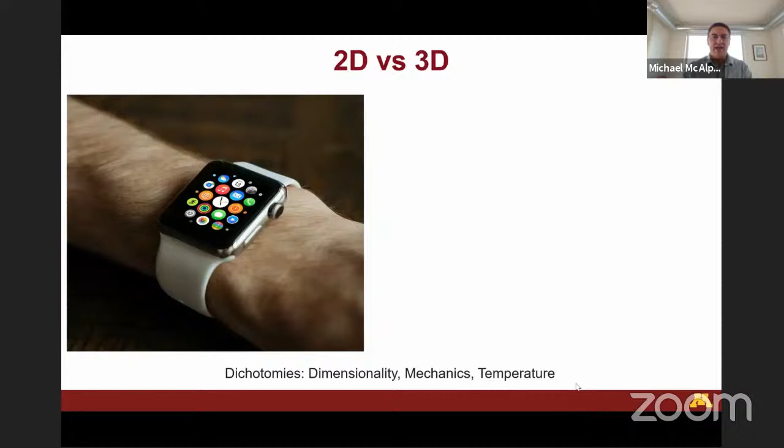But the question, and this is the question that Zhigang and Sigurd have been asking for 20 years now, and John Rogers as well, is: if one wants to integrate silicon or electronics with the body, what are some of the issues with doing that? And of course, one of them is the mechanical mismatch. Silicon is a single crystal, 100 gigapascal Young's modulus, brittle material, whereas skin is soft, flexible, and stretchable.

But there's also the fact that the silicon needs to be crystallized to be a single crystal. So that's a temperature requirement of over 1,000 degrees C, which is completely incompatible with biology. DNA can go up to maybe like 40 or 50 C before it denatures.

But then there's also the dimensionality mismatch. All of photolithography and semiconductor processing is planar, right? And biology, from the scale of DNA and proteins all the way up to organisms, is all three-dimensional. So there's that dimensionality mismatch. It's okay for a smartwatch when you have this sort of two-dimensional interface, but if you could take it to the third dimension, you might be able to grow electronics and biology together on the same common platform.

And actually, a lot of people don't know this because a lot of people haven't even heard of Minnesota, the state. Although this election cycle, we've been getting a little bit of attention.

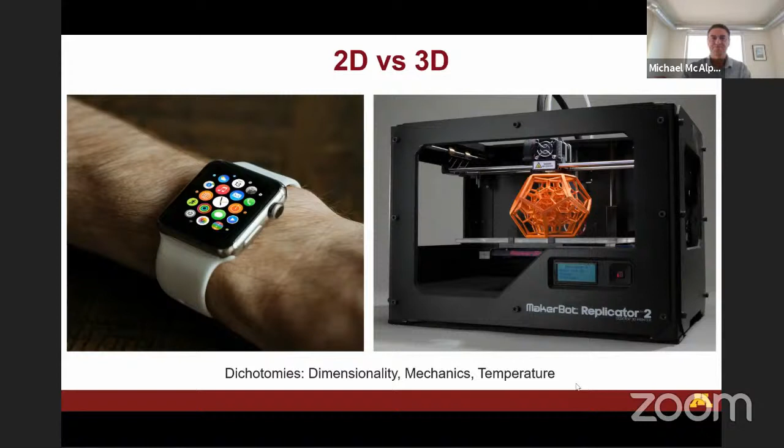And our printer setup is one that we custom built. We set it up back in 2015. It's basically an Aerotech motion control stage, and then we mount these syringes on it where instead of heating a thermoplastic and extruding, we just use pneumatic extrusion. And then sometimes we do UV curing, like if we're printing silicones or ionic hydrogels.

On the same comment, the thermoplastics are replaced with inks, right? So we basically can have multiple nozzles printing multiple types of inks on the same common platform, all pneumatically dispensed. And you can image the entire process. And to be honest, I used to think that this is the most important part of the 3D printing technology. And as I'll show later, I've realized that the most important part of the printing technology is the one that you don't see, which is the computer, which controls everything.

So I see printers now less as manufacturing tools and more as robots, part of a larger robotic system where the robot may be involved in subtractive processes and additive processes and artificial intelligence, and tracking and whatnot, all on the same common platform.

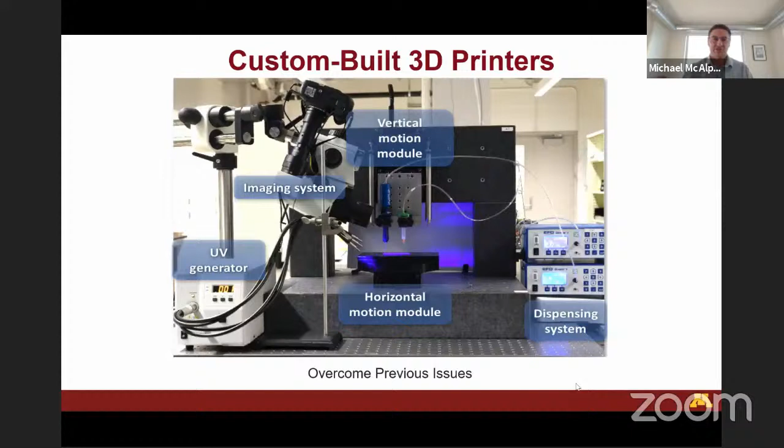And the nice thing about this platform is, from a scientific standpoint and engineering standpoint, you can merge many disciplines on a single platform. I mean, you have biological, biomedical, electrical engineering, mechanical engineering, manufacturing, computer science, chemistry, and the formulation of the inks, all on the same common platform. And it's amazing because we have students who are brave and they want to work at this interface, at this interdisciplinary type of field, and lots of exciting things in principle can be done here.

And another concept here that we've introduced is this idea that in addition to multifunctionality, in principle, it's also multi-scale. Now, we can't print at the nanoscale because in order to really print something, you have to be able to extrude through a nozzle. And so there's only so much shear you can apply before you damage the material or damage the nozzle.

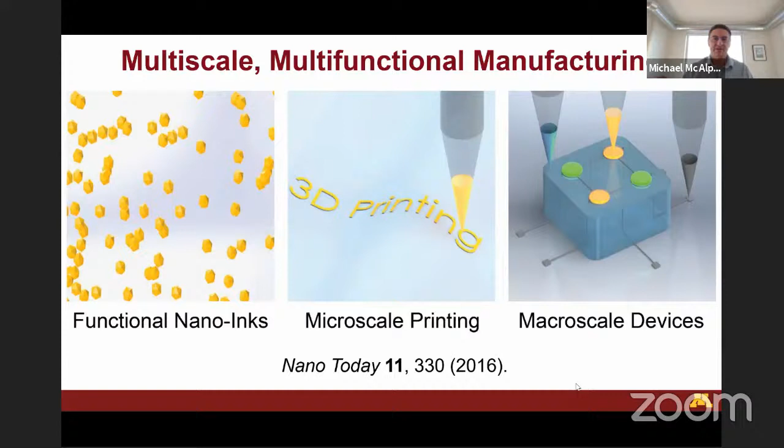But we do use nanoscale inks. So the ink can be at the nanometer scale, especially for incorporating functionality. And then we print at the micron scale, typically 10 to 100 microns or higher. And then we build devices which can be as large as a foot by foot by foot, right? Cubic foot. And so we start with our functional nano inks, we print at the micro scale, and then we can develop macro scale devices. So in that sense, it's a multi-scale and multifunctional platform. Okay.

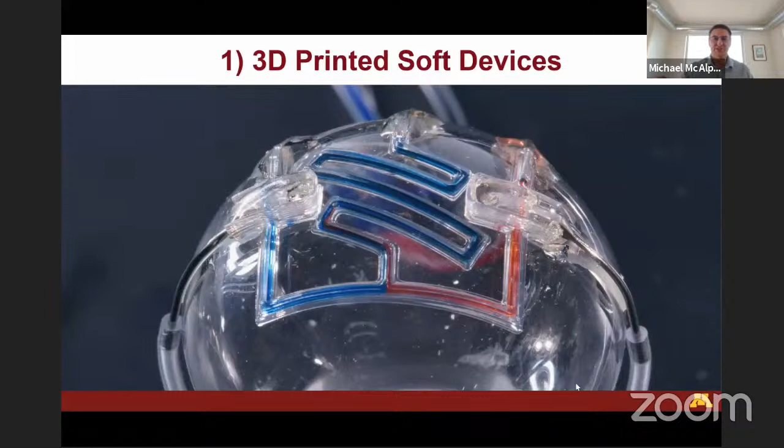So for the remainder of my time here, I'm going to focus on some specific things we've done, and these are just some highlights, really. And it's not just us, of course. Now many people are printing lots of different types of things, but these are some of the things we've done recently that I'm excited about. I'll start simple and then build complexity.

And so one of the early things we did, this low-hanging fruit, is organ models, right? Because we're in this biomedical arena here in the Twin Cities, and we were inspired by some of these papers, which say that surgeries, of course, come with risk, right? And this British Medical Journal has this infamous statistic that medical errors are the third leading cause of death. Whether that's true or not, I'm not sure. Especially now, probably coronavirus is the third leading cause of death. But

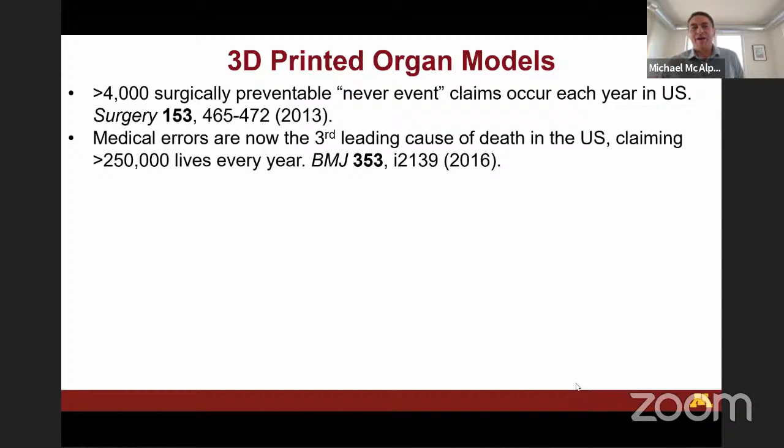there are risks associated with surgery, and there are many reasons for that, of course. But one of the reasons is that the doctors rely on two-dimensional images. I mean, they rely on CAT scans and MRI scans, which is 3D data. At the end of the day, it's 3D data, but it's represented in two-dimensional format for visualization.

And then they go to the surgery and they sort of had to improvise or piece together in their mind what the three-dimensional organ might look like. And this is an arena where 3D printing can play a role, because you can basically take that 3D data directly from the patient and print organ models that replicate the anatomical structure of the actual organ that's going to be operated on, right? So the doctor can analyze it in advance, plan the surgery. Residents can use it for practice.

And in fact, there are some papers which show that there are some statistical improvements in accuracy in patient selection, helping the patients themselves understand the surgical procedure, reducing the operation time, and reducing blood loss. All, of course, together in principle should help reduce surgical complications.

But the only problem with this is that these organ models are built around hard plastics. So you can't cut into them, you can't suture them. They don't feel like the organ. They replicate the anatomical geometry, but they don't feel like the organ. They don't have any functionality built into them.

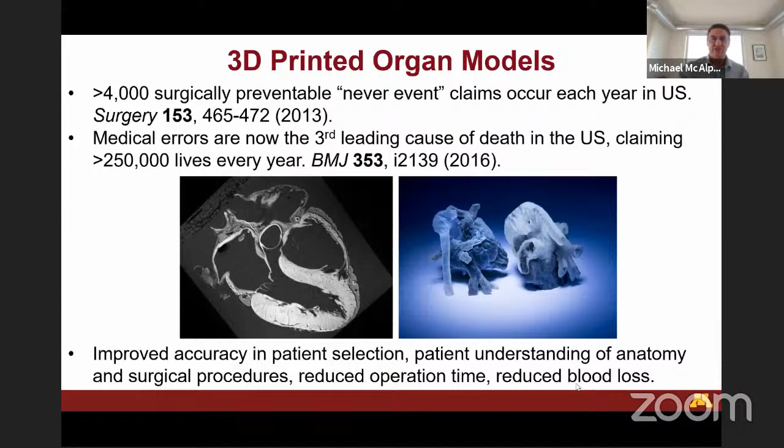And so, believe it or not, we were the first group to publish this idea, 2 years ago, that you could print a soft organ model. And now this is actually sort of a commonplace idea, but this was the first publication where it was actually demonstrated, where instead of using the hard plastics, you can use soft silicones to print an organ model which replicates the tissue mechanics, and then also build in some of these advanced functionalities like electrical sensing so that it can give you quantitative feedback.

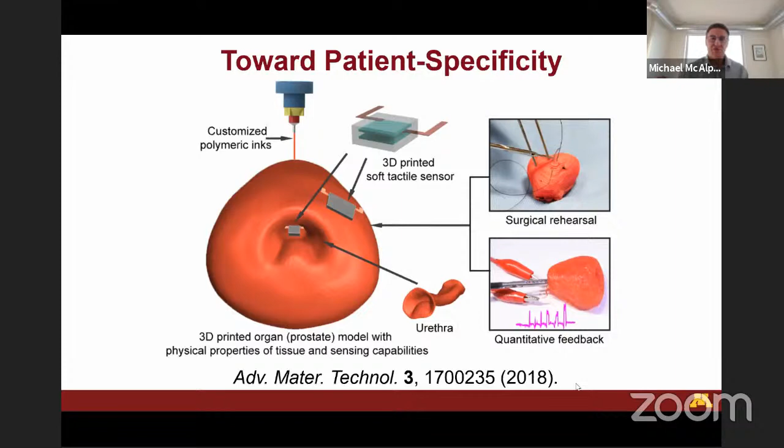And in fact, these tactile sensors are built around Zhigang's ionic hydrogel, as you'll see later, but merged onto a 3D printing platform, okay? And this is realized by the fact that these hard plastics like ABS that are typically used in 3D printing have Young's moduli on the order of gigapascal or even hundreds of megapascal. And there are some of these developing materials, the Tangos and the NinjaFlexes, which can reach down to low megapascal or maybe high kilopascal. But some of the biological tissue can be on the order of 10 kilopascal or less.

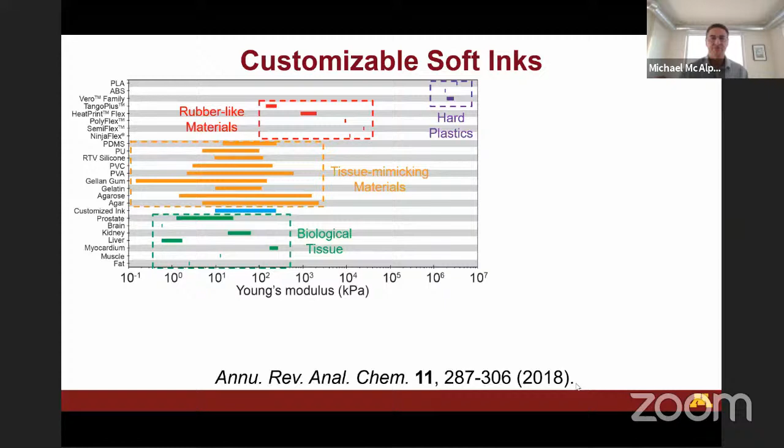And so if you want to replicate that, then you really need a soft material, something like silicone or hydrogel, and silicone is a thermoset, so it can't be melted and extruded, right? So it can't be merged onto the Stratasys platform, at least not right now. I'm sure in the future they'll find a way to do it. But with our platform, because of the shear thinning properties of silicone, we can print silicone pneumatically.

And so we basically developed these inks which combine silicone grease, which is a soft bulking agent, with silicone sealant, which provides some degree of vulcanization or cross-linking, with some other additives to print organ models that are soft and more tissue mimicking than the hard plastics. Basically replicate the feel of the organ. And so this is an example.

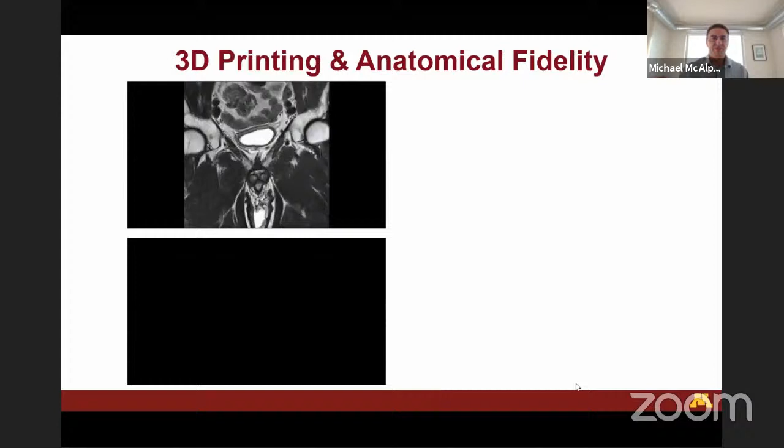Again, the great thing about the University of Minnesota, we collaborated with a urologist on this. He got us the MRI data of 3 men who were undergoing prostate surgery. They had tumors in their prostate. They were having their prostates removed. So we got the MRI data, segmented it, and converted it to 3D data that could be printed,

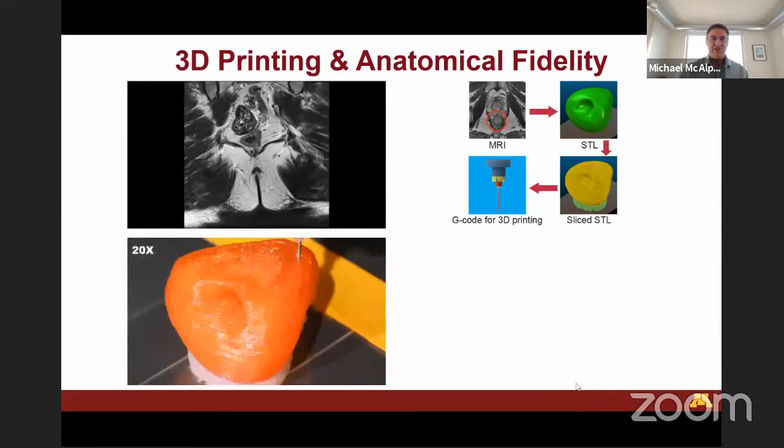and basically printed these silicone inks that I described before. The nice thing about these is they are solvent-free. They actually don't warp over time. They retain their softness. You can print multiple materials here to create the interior structure. You can use sacrificial materials that can be removed at the end of the process. You can add coloring agents to replicate the color of it and build up. So this is one of our early examples, this simple prostate.

But we also did an MRI scan of our printed prostate and found that there was a close match anatomically between our printed prostate and the original prostate that we got from the MRI scan.

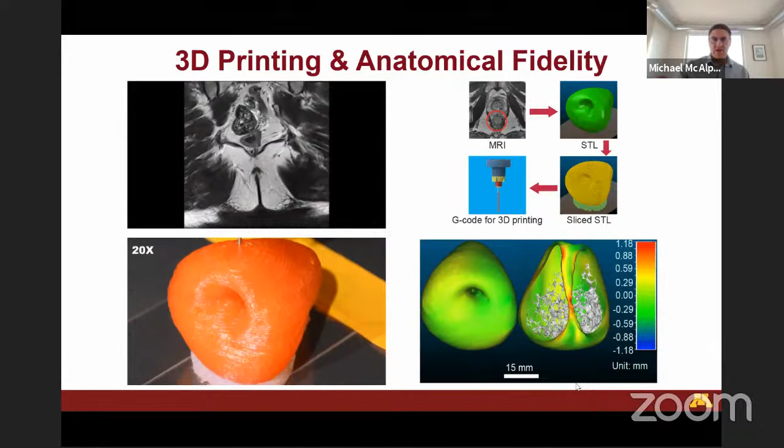But in addition to that, and this is the amazing thing about University of Minnesota, the prostates were removed from the patient, and my postdoc was there to get the tissue samples right as they were being removed, so we could do mechanical tests on the actual prostate tissue samples from 3 human subjects. And they were being removed anyway, which meant we didn't even have to go through the human subject process. So we could just collect these samples and do mechanical tests on them to determine their mechanical properties.

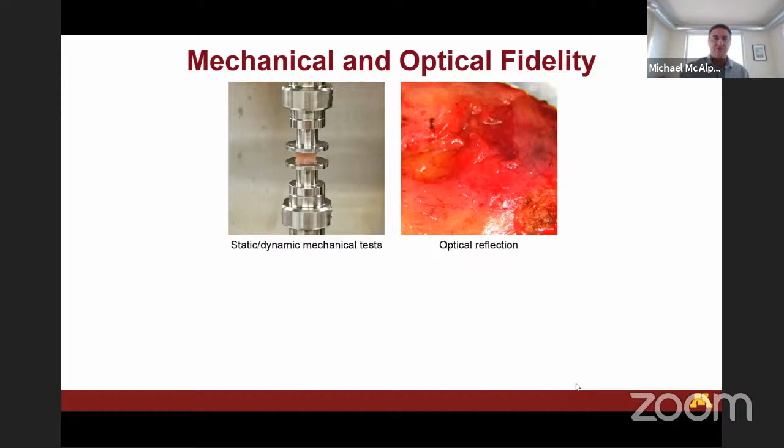And so we had those 3 tissue samples, and then we developed 3 inks that could be tuned so that they could basically mimic the mechanical properties of the tissue samples, as you can see, in the low strain regions. We don't yet have the ability to do strain stiffening behavior, but we're working on things like that.

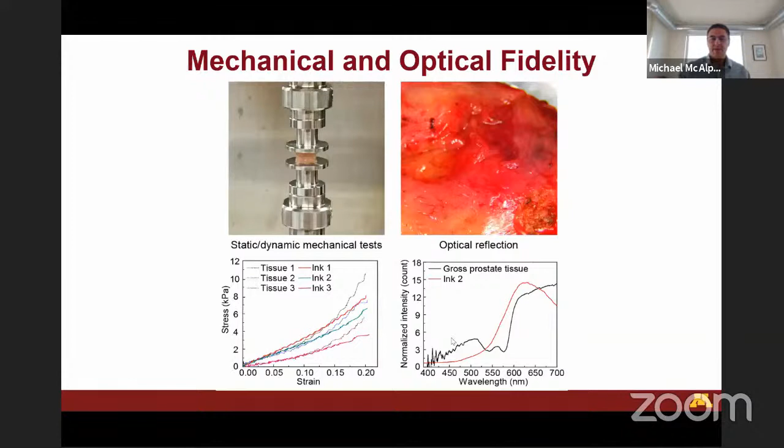And then we can also sort of replicate the color of these organ models by adding dyes. So the point here is that not only does it replicate the organ anatomically, it also replicates it mechanically based on our own studies with the actual patient samples. We gave these to some urologists here, and they actually found them useful. Believe it or not, they were sticking endoscopes inside of them, and then you can do things which you can't do with the hard plastics, like suture them, and basically do practice surgery on these models.

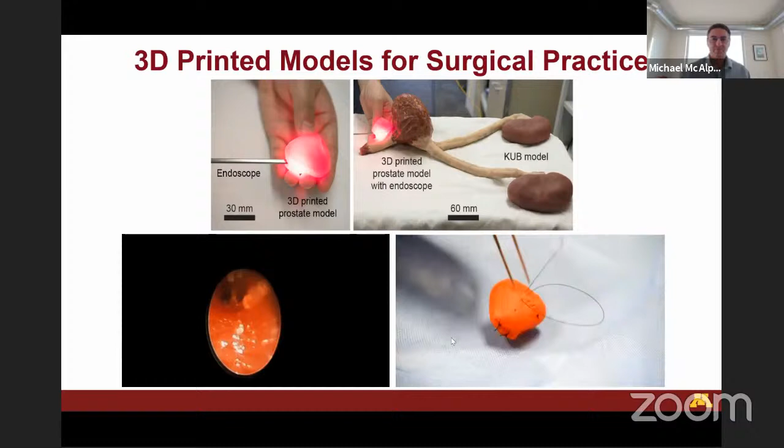And again, we've had these sitting around our lab for years now. We have kids come in and they play with them, and they don't harden. They haven't warped over time. They maintain their integrity. But this is all very simple. I think we really wanted to build complex functionality into it, and we were inspired by Zhigang's paper, where he's building these ionic hydrogels.

The point here is that they're transparent, they're stretchable, biocompatible, and the other key point is that you have this ionic hydrogel and this dielectric, for which Zhigang used 3M tape. 3M is also headquartered in Minnesota. But the point here is that the capacitance of that double layer at the electrode is much larger than the capacitance across the dielectric. So the voltage drop occurs across the dielectric, right? So you don't have issues with degrading your interface or the electrolyte.

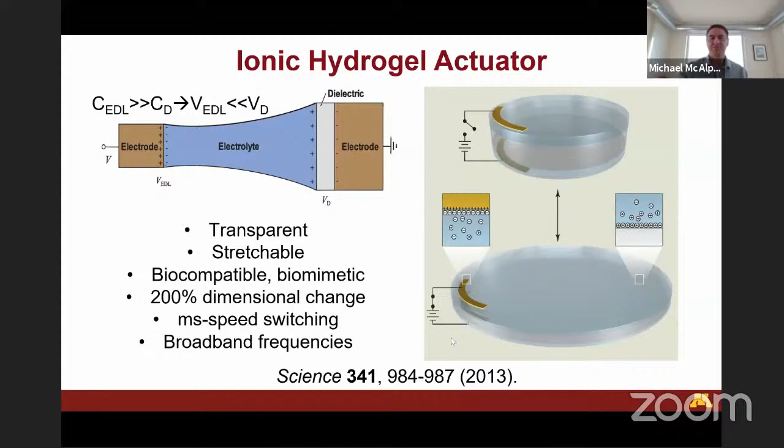And Zhigang basically demonstrated this actuator where by spreading ions across the sandwich, the ions attract, and it forces it to compress and then stretch out due to the Poisson ratio. And so we wanted to translate this to our 3D printing platform by printing the entire structure. The tape can't be 3D printed, but we can replace it with silicone. And we can use the same silicone that we use in the organ model, so that the entire structure replicates the same softness of the organ model and basically blends into the model.

So we 3D printed the ionic hydrogel here. There's one other difference, which is we use polyacrylamide, and then the ions that we use. Zhigang used sodium chloride, but we had to print this structure, and it takes some time to print it, so it can dry out. And so we switched to lithium chloride because it's hygroscopic, and then it's sandwiched with a silicone dielectric in between, and then we put these copper leads on it.

So this not only can act as an actuator like Zhigang showed, but also as a sensor. We can do a calibration curve with the applied pressure and measure the capacitance of the structure, so that we can print these things and incorporate them onto our soft organ model, so that you have this electrical feedback. So as you do this faux operation on the organ model, it'll actually give you quantitative feedback based on these 3D printed ionic hydrogel sensors that are incorporated on the model and also inside the model as well.

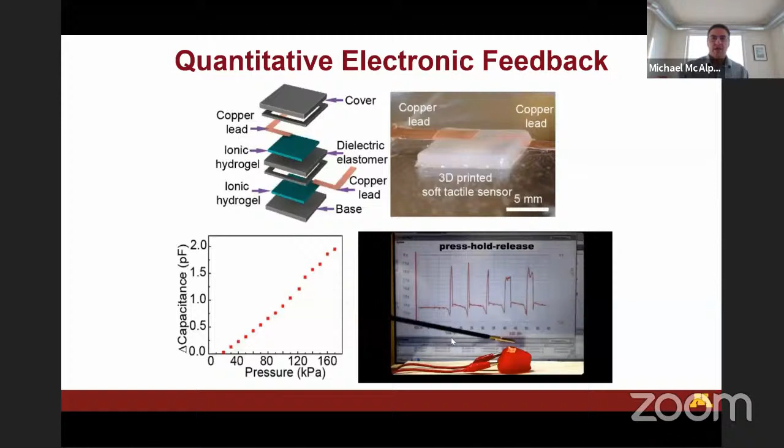So now we're building complexity here. We go from a single material, the silicone of the model, to now multiple materials that are printed, including ionic hydrogels, the model, and the supporting structure, brought together into this structure here. And as a separate paper, this was published in EML.

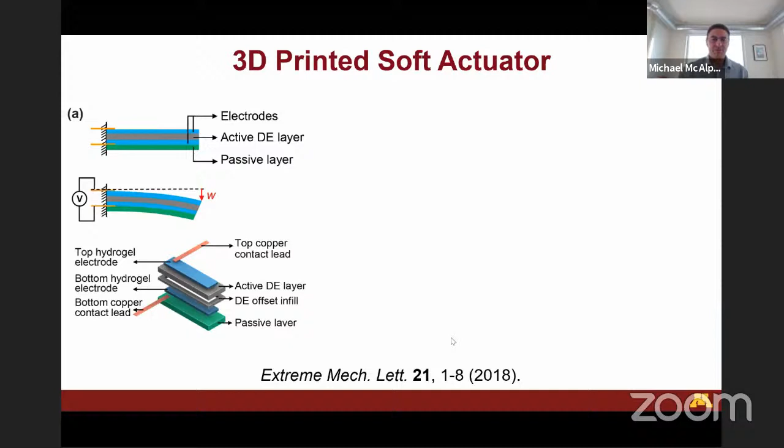We wanted to demonstrate that we could also 3D print an electrically driven actuator, and the difference here is we added this passive layer, so that instead of flattening like Zhigang showed, it actually will bend. The way we were able to do this was we incorporated barium titanate particles in the silicone as a composite. And the entire structure was fully 3D printed.

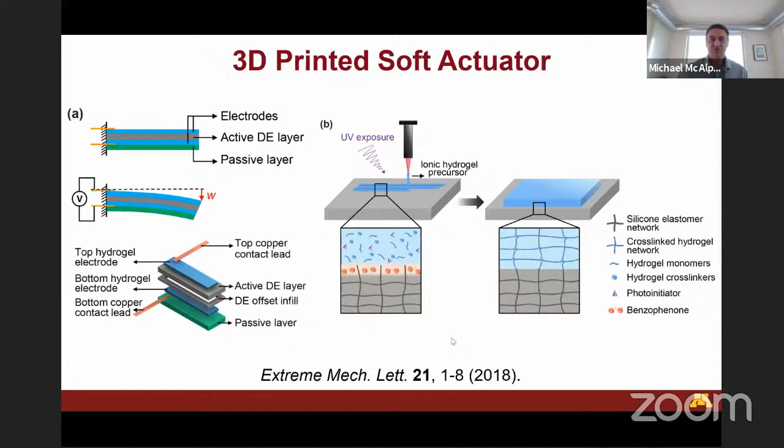We print the ionic hydrogel and then the silicone dielectric, and then we use benzophenone and activate it with UV to print the top ionic hydrogel electrode in order to bond it to the underlying silicone and create a full structure. And as I mentioned, that silicone contains barium titanate particles. So now there's multiple materials, all built into this 3D printing process. The entire structure was 3D printed.

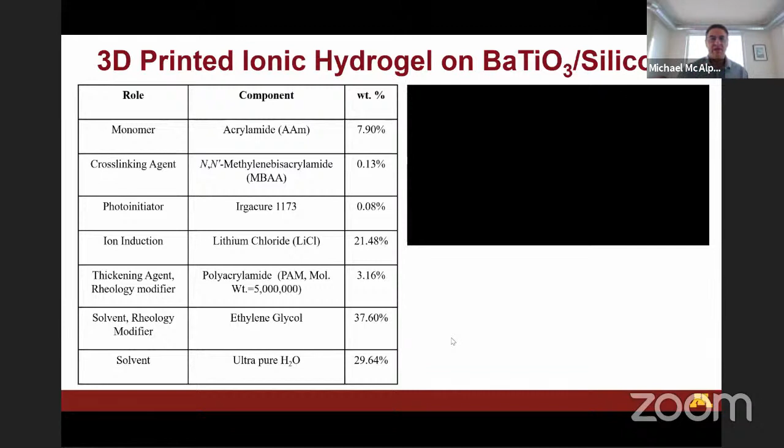So again, we use polyacrylamide here. We use the Irgacure 1173 photoinitiator. We're replacing the sodium chloride with lithium chloride so it doesn't dry out during the printing process, which may take an hour or several hours. And so this is what it looks like as we're printing this structure.

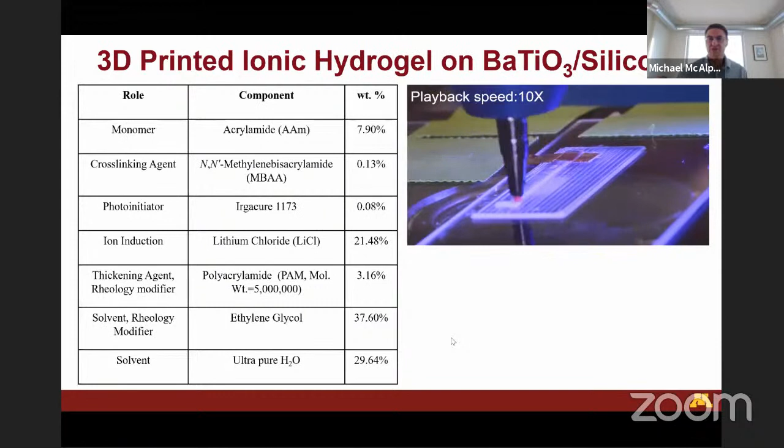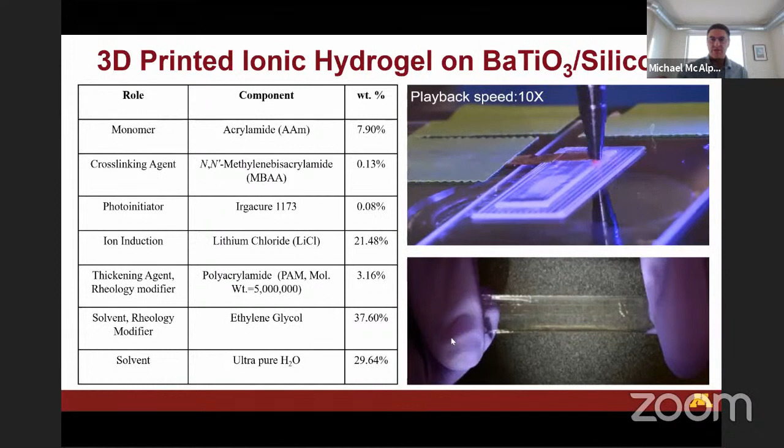So same type of sandwich structure that Zhigang showed, but now fully 3D printed: ionic hydrogel, silicone with barium titanate, and then another layer of ionic hydrogel on the top to create one of these ionic hydrogel capacitors, but used as a sensor or as an actuator. And you can see, of course, it becomes somewhat opaque with the barium titanate, but it is actually still flexible and stretchable, and it's under UV the entire time in that video.

And believe it or not, this does actually work. So this is an example of a fully 3D printed electrically driven sandwich ionic hydrogel based actuator here. You can see it does require large voltages, of course. This is an ion instead of electron capacitor. But as we build this up, we can actually eventually get up to a full centimeter of actuation here.

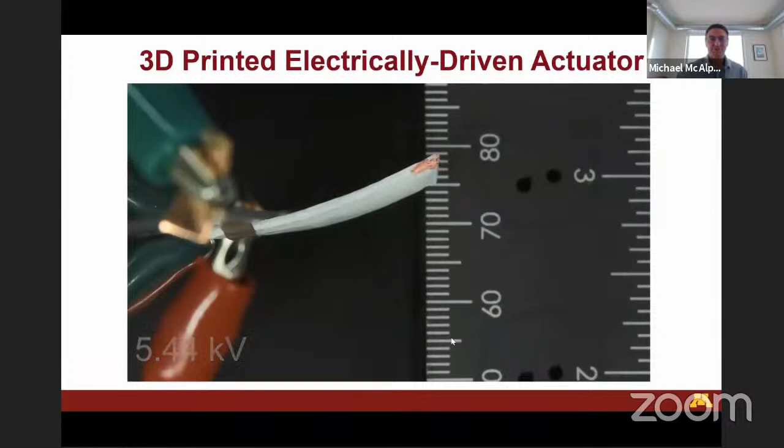So my student was very excited when we realized this device here. Okay. Okay, so we're almost there. There it is. All right, so that's some fun things we can do.

More recently, actually, we've been working with Medtronic. So if I play this video here,

can you hear that audio? No, not right now. Okay, so let me unplug and then I'll replay.

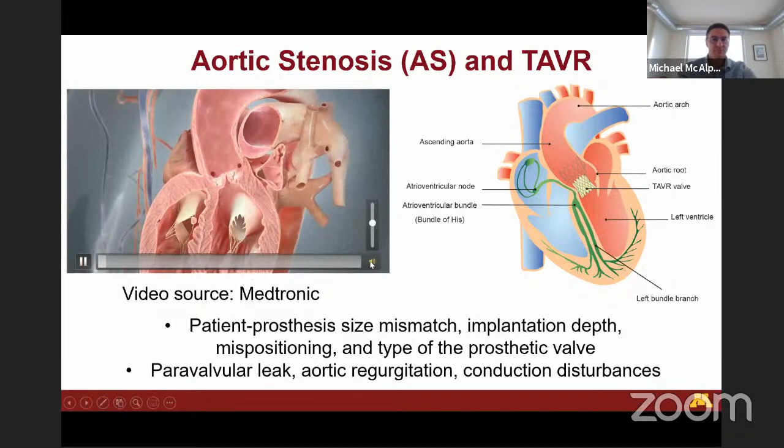Valve system serves a broad range of patients with severe aortic stenosis, a narrowed heart valve that is unable to open and close properly. In the catheter-based procedure, a physician makes a small incision through either the leg, upper chest, or shoulder and guides the new valve into position to replace the failing aortic valve. Once in place, the CoreValve system's self-expanding nitinol frame enables physicians to deploy it in a controlled, accurate manner. After expanding, the new valve takes over the native valve's function to ensure that oxygen-rich blood flows efficiently out of the heart. Patients at high risk for open heart surgery who are treated with a minimally invasive CoreValve device have a greater chance of survival at 1 year compared to patients who undergo surgery.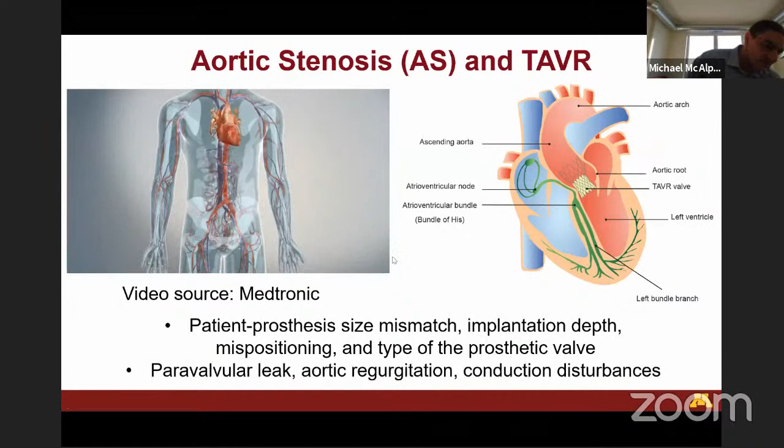Okay, did you hear that? Yes, fabulous. Okay, good.

So actually, we did pair with Medtronic on this most recent project based on these organ models, where they wanted to figure out, this is a minimally invasive surgery, so it's not an open heart surgery, but even with these minimally invasive surgeries, there's some issues with placing these valves and sizing the valves correctly. And so if we could create organ models that replicate the patient's anatomy with internally integrated sensors, we can help them make the minimally invasive surgery go more smoothly.

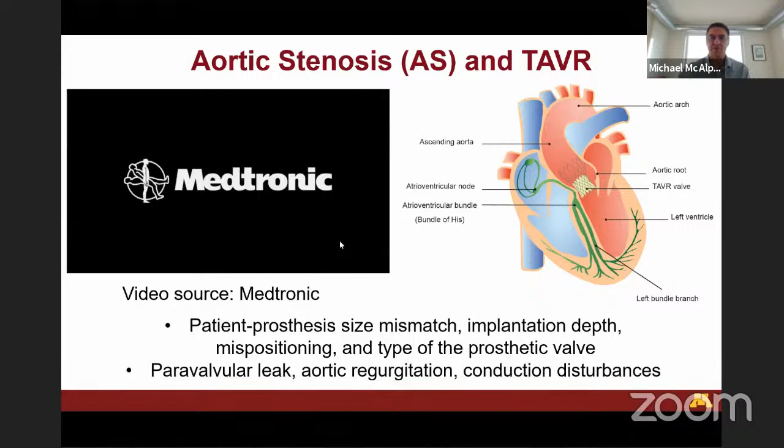And this can prevent things like leakage around the device or regurgitation through the device as you replace the aortic valve there. So this is a more sophisticated model that we published recently in Science Advances, where now we're building multiple inks into the structure. And that also includes calcified regions based on a spackling material, where we're replicating the calcification in the aorta of a diseased patient.

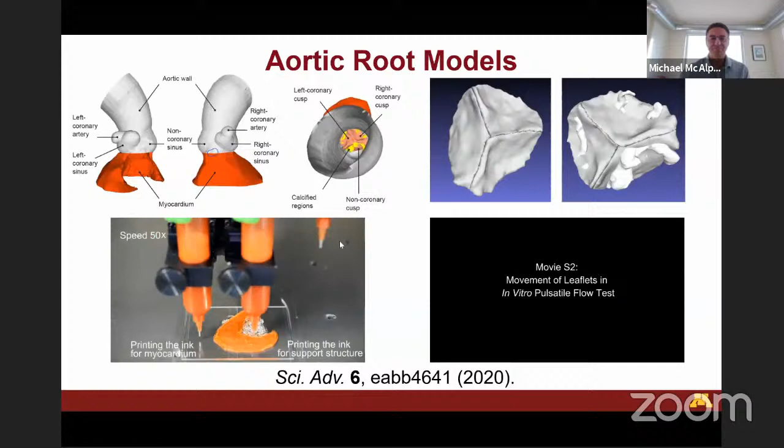And so now you can see we have inks that replicate the myocardium, supporting ink structures, which is basically a Pluronic that's removed at the end of the process. And we can recreate the leaflet structures. We can create the calcification in this multi-nozzle approach here. And we did see that when we do some of these hemodynamic studies, the calcified structures do actually require more pressure than the non-calcified, basically replicating the patient's disease.

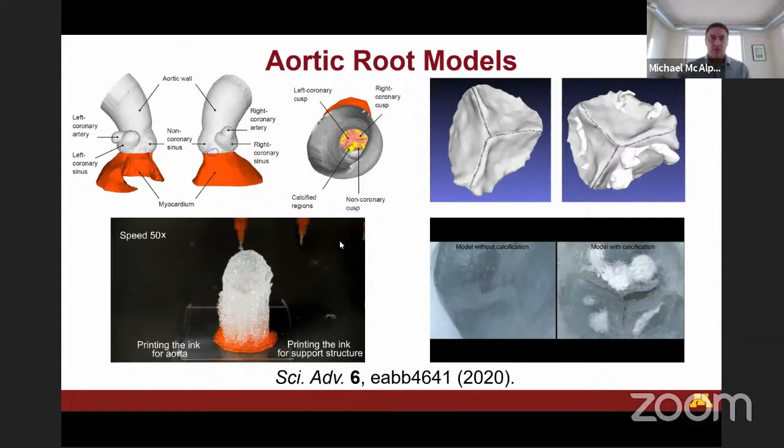And once again, we incorporated some of these ionic hydrogel sensors into the model, but this time, instead of being printed separately and then pasted on the model like we did with the prostate, now we're at a point where we can integrate these devices. So this is a 3x3 array, 9 of these sensors fully integrated into the model. And you can see here that it's built up. Those are the 3 dots on the right-hand side.

As we build the model, we can essentially build these ionic hydrogel electrodes directly into the model. And those will act as sensors to give us feedback on how the TAVR device is placed into the valve before the surgical process. And once again, the silicone dielectric in the ionic hydrogel sensor is actually the same silicone used in the model. So the sensors just blend straight into the model. They don't affect the mechanical properties negatively at all.

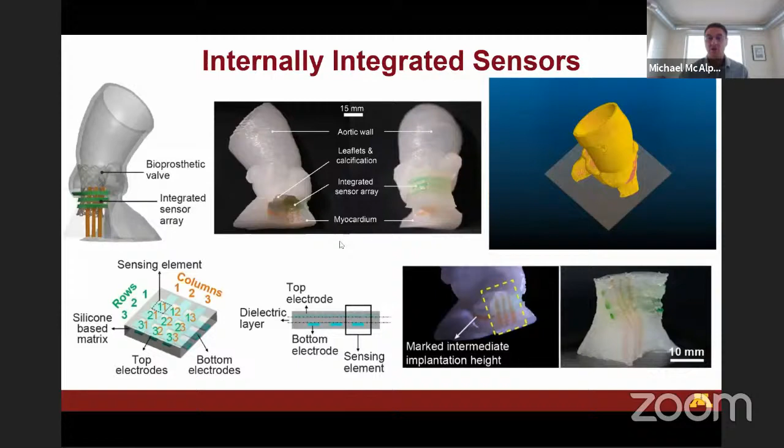This actually helped us when we worked with Medtronic. We did some studies where we were able to place these valves into the model, and the quantitative feedback from the sensors helped determine the sizing and placement of these valves directly into the models, which in principle should help with patient selection and sizing going forward.

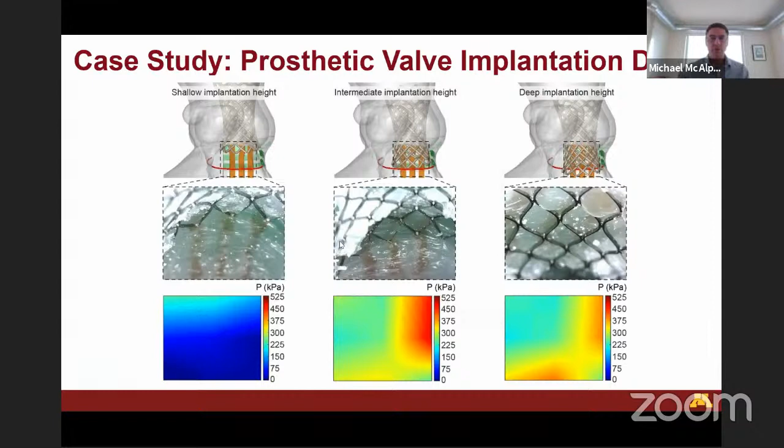One other thing we've done recently to finish off these soft devices: can we also create microfluidic structures? Some stereolithography methods have been used to create microfluidic devices, but extrusion-based printing has had limited success, mostly using sacrificial materials. What we've recently demonstrated here is something I'm pretty excited about. We submitted a patent on this, which is, can you build up microfluidics layer by layer in supporting structures?

So to create a basically enclosed structure like you see here, you build up silicone where each additional layer is slightly offset from the layer below it, so you create a fully encapsulated microfluidic structure.

Compared to traditional microfluidics, there are significant advantages here. You don't have to go in the clean room, you don't have a big slab of silicone that you're putting down on your sample, you just print silicone where you need it. In principle this overcomes one of the difficult challenges with microfluidics, the automation problem. This is automatable, you don't need sacrificial materials so it won't contaminate your substrate, and you can align directly onto the substrate using the printer and print onto any surface.

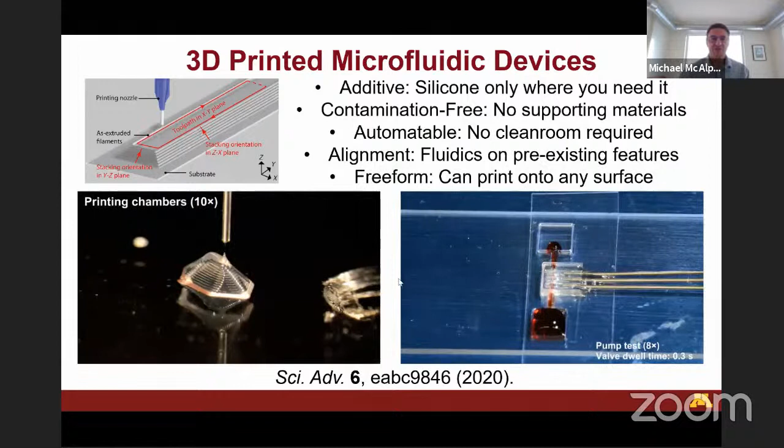So here we're showing you can print microfluidics on top of microfluidics to create peristaltic valves, a fully 3D printed structure. This is also an example of microfluidics directly 3D printed on a microfabricated sensor. The sensor was microfabbed, but then we aligned our microfluidics directly to the chip. Even aligning a big slab of PDMS to a chip is a difficult task, and this was done pretty much in an automated process using our 3D printer.

We flowed in salt solutions to show the sensor worked as we flowed solutions over the chip. I think this opens significant potential in taking the entire space of microfluidics and bringing it to a portable 3D printing platform, so doctors don't have to go to a clean room. They don't need a big slab of PDMS. Just in the office, they can print any type of microfluidic structure and do biological assays directly in their office, using these simple structures that surprisingly haven't seemed to have been published or developed before.

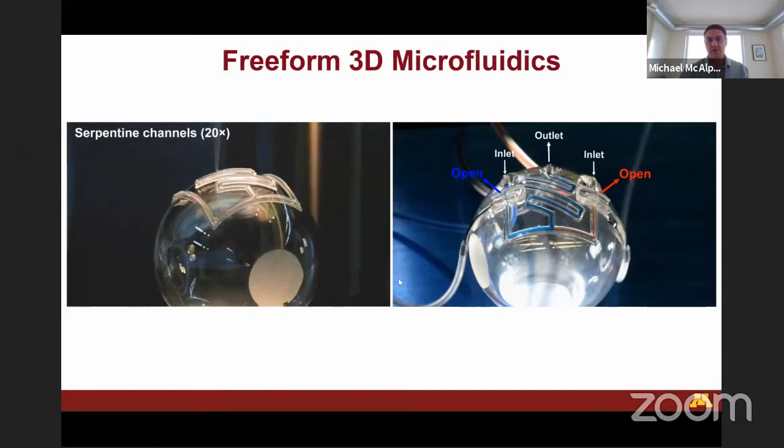So we're printing two inlets and two valves across the two inlets directly on this sphere. This is a glass sphere here. So there we're printing the valve on either side, to basically create microfluidics on any type of surface.

So maybe in the future you can print microfluidics on your skin to wick sweat off the skin and analyze sweat. As you can see on the right-hand side, this is operational. You can see we're switching between the blue and red fluids directly on this spherical structure by opening and closing those valves. Entire structure 3D printed on a sphere here.

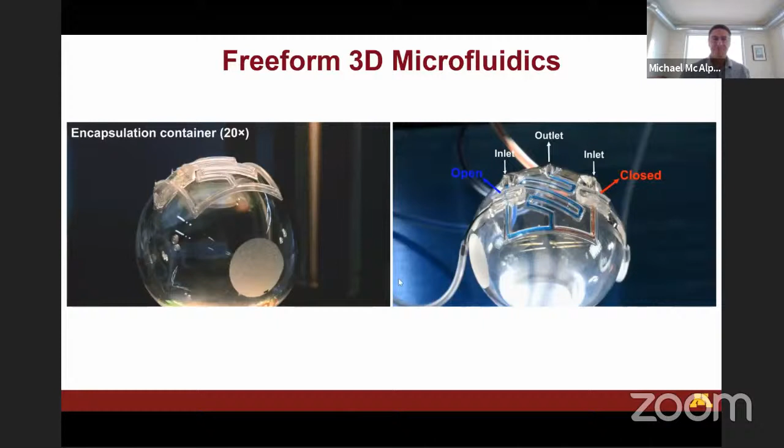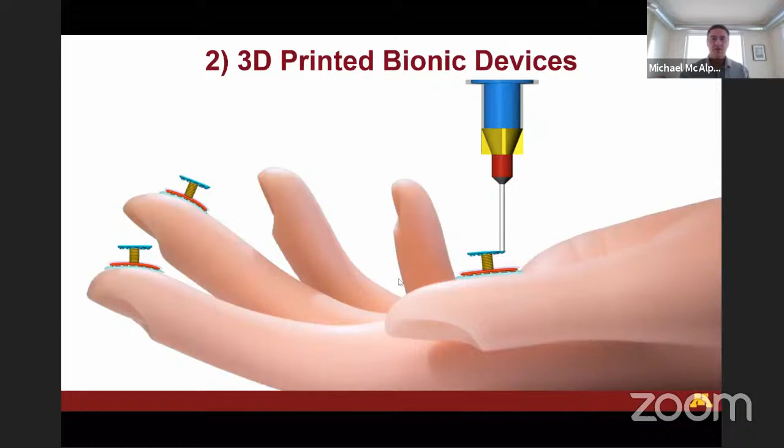So, freeform microfluidics. This gets us to the other topic I'd like to talk about today, which is, can you actually merge electronics and biology together? Can you actually print electronic devices directly on the skin?

John Rogers pioneered this tattooing-based transfer printing approach to taking electronics, peeling it off the silicon wafer, and then printing it onto the skin. One of the visions we had is, what if you're a soldier in the middle of a desert somewhere, and you wanted to print electronics on your skin for a warfare sensor or a solar panel or whatever, and you just had a printer in your backpack? So instead of a temporary tattoo transfer printing process, this is like permanent tattoos, because you're using a needle.

So, can you write electronics directly on the skin? To do this, we had to solve some significant challenges, because the back of your hand is complex topology, and if you put your hand under the printer, when this needle comes at you, your natural reaction is to want to pull your hand away. So you have to track your hand so that it can't escape from the robot. And then of course we also had to develop electronic inks that cure at room temperature so that we could print them on the skin.

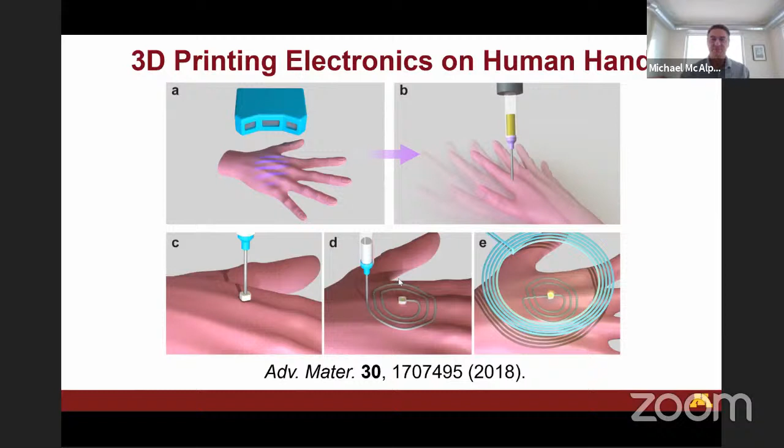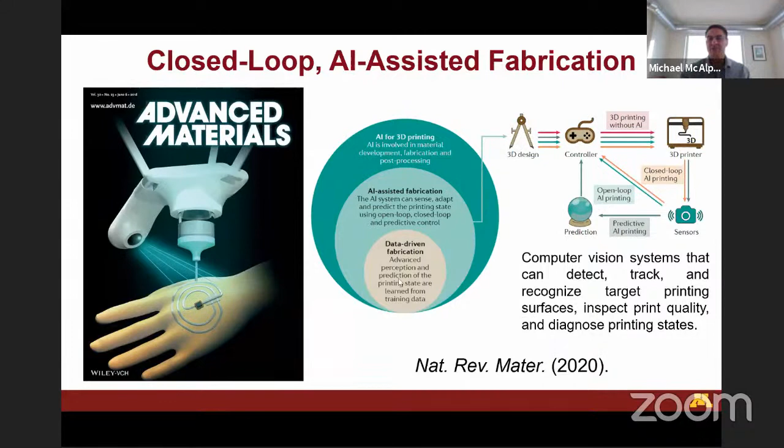But I had this amazing student in my group who figured out how to do this, and basically incorporate these tracking cameras onto our printing platform. This is a first step toward incorporating artificial intelligence into the printer, so that it can sense, adapt, and possibly in the future predict the printing state. So you go from an open loop printing system, where you scan and then print, into a closed loop system where you're using cameras to provide real-time feedback to the printer, so you can track the motion of a moving target and print electronics directly on a hand.

And we use these silver-based inks to do this. This is a silver nanoparticle ink that's incorporated into a polymer matrix, and after you print it, it actually cures at room temperature. So you don't have to heat up your hand, you don't have to sinter the ink, and you can get pretty decent conductivity out of these inks.

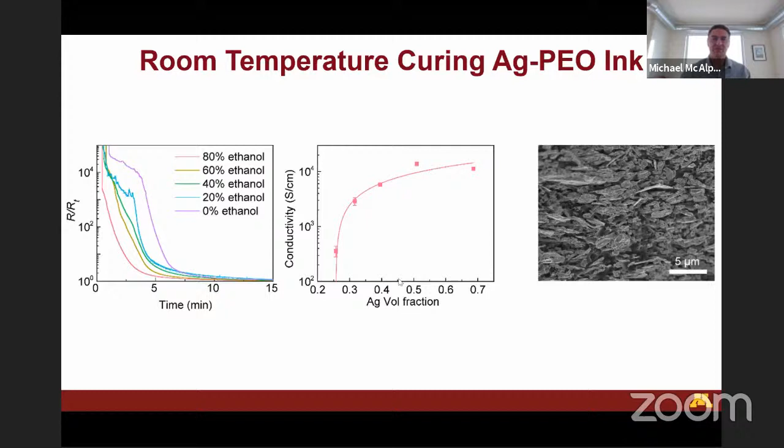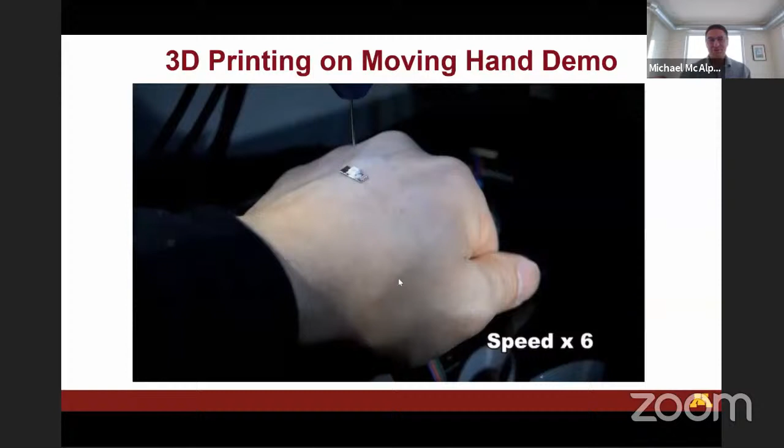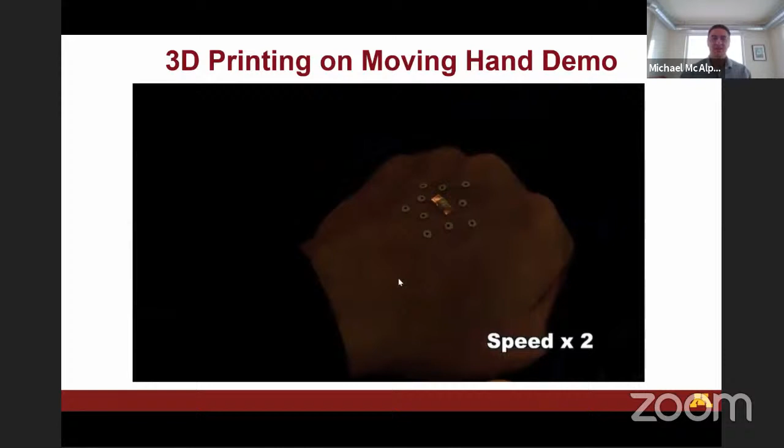But nothing says more than the movie here. This is one of my favorite movies - there's the hand under the printer, and we pick and place an LED, that's a commercial LED. We use the printer to pick and place the LED on the back of the hand. These are tracking markers used to track the motion of the hand. We do actually scan the topology of the hand before we print, but then the tracking is done in real time.

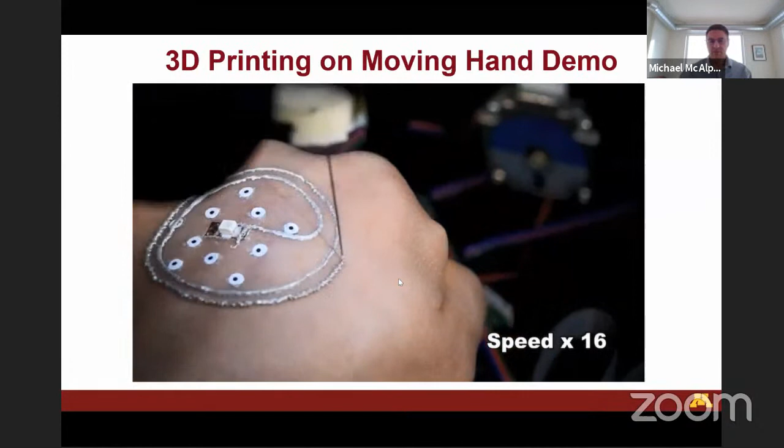So this is a silver-based ink that's printed directly on the skin - basically directly tattooing electronics on a hand which is moving. So this hand is actually moving, and the printer is tracking that motion using the cameras on the printer, and compensating for it in order to maintain the geometry of that antenna structure, which is being connected to the LED.

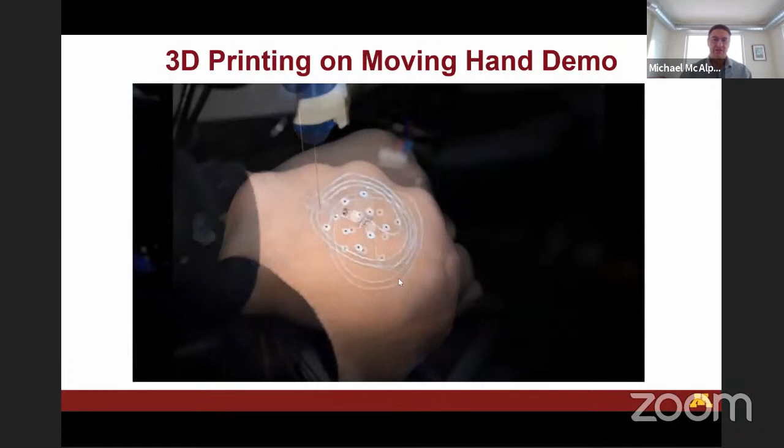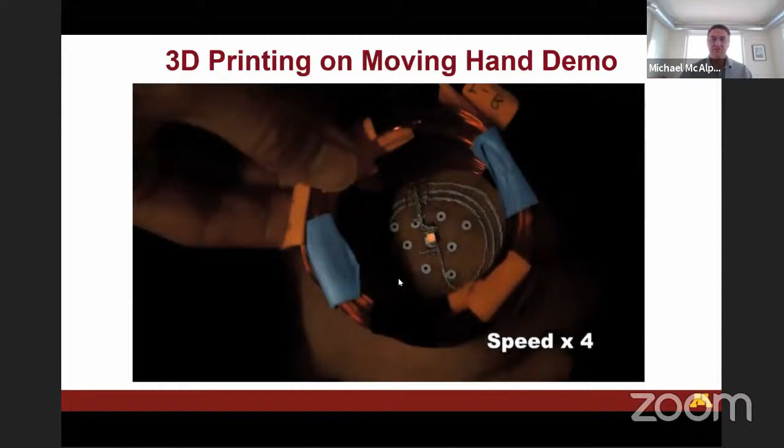I should mention that this printer we used here is called a Delta Robot, which was a $300 portable printer that weighs about 3 pounds. So this really is something you can put in your backpack, carry around with you, and we have actually taken it to science fairs and stuff to show kids - take it out and show this tracking system. And so now we can wirelessly power the LED after printing the antenna on the back of the hand. So directly tattooing electronics on the skin, no clean room required.

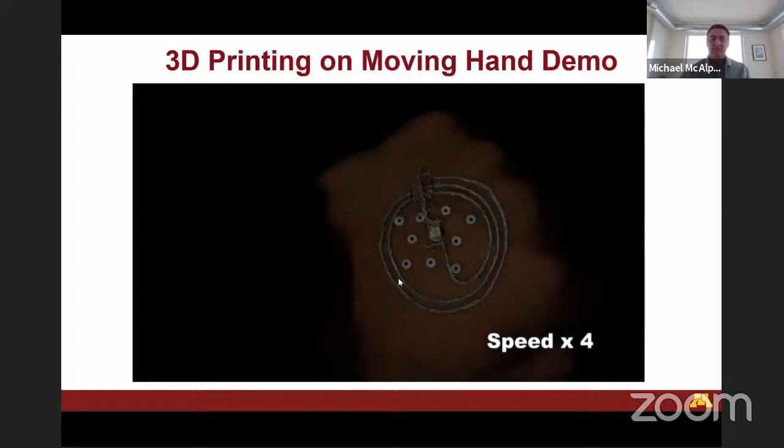Just using a portable printer and some inks and a sophisticated tracking system that can do this. I should mention that you can actually remove these inks after they dry - you can see we're removing it here. They withstand some degree of mechanical deformation, not a whole lot, but you can remove them just mechanically. If you add water, eventually they'll dissolve away, so they're not so hard to remove.

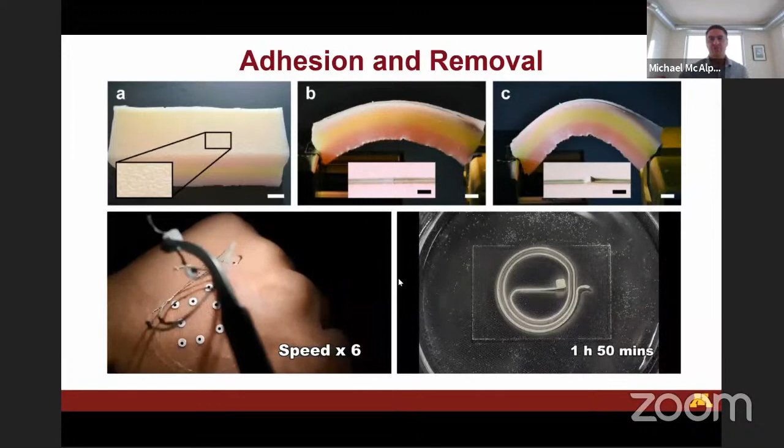But what I'm really excited about is this thing we published more recently, which relates to these classic papers on elastically deformable models. The thing about deformation is, in that hand example I just showed you, the hand is being treated as a rigid body. So we're accounting for rotation and translation of the rigid body of the hand. But the thing is, there's organs in our body, like our lungs and our heart, which undergo additional degrees of freedom - which is deformation.

And so the thing about deformation is, in rigid body motion, the potential energy is basically zero. But in deformed structures, you have energies associated with those deformations. So basically, the question is, can you actually track a deforming target and compensate for these higher degrees of mechanical deformation, and then print a device which can sense those deformations of that organ surface. I see this as a first step toward merging surgical robotics and additive printing of biomedical devices on the same common platform, to have a complete surgical robotic solution of both the subtractive surgery as well as the additive biomedical device printing.

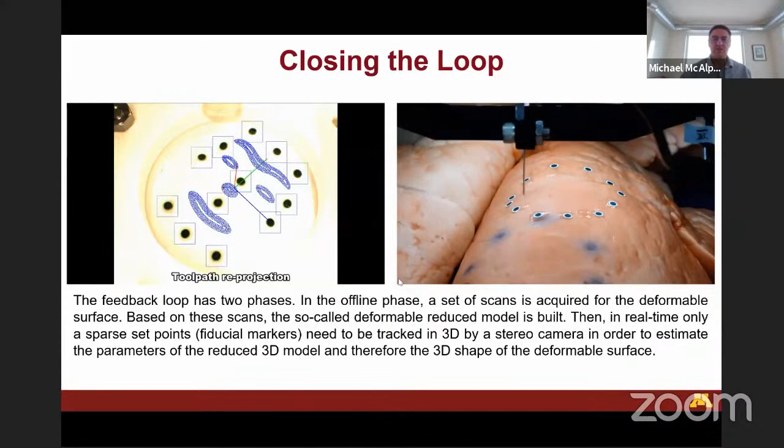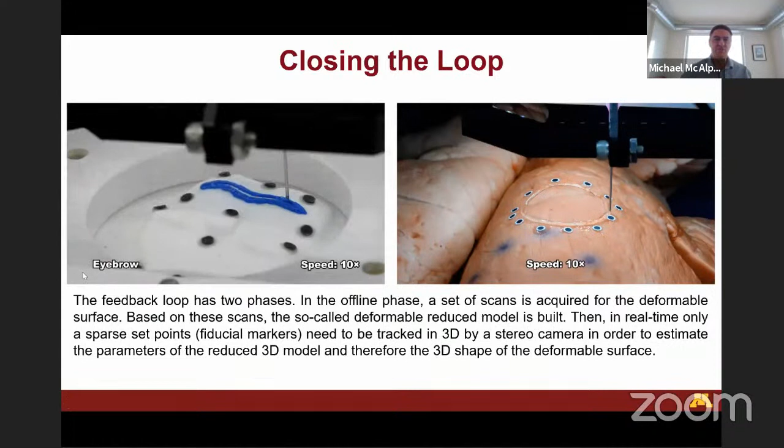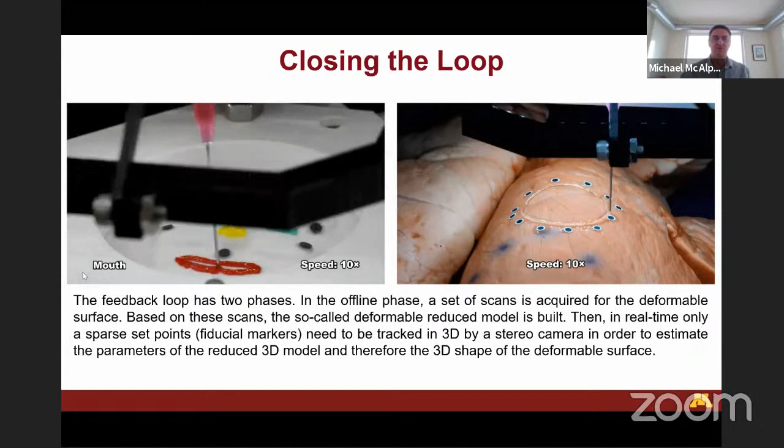On the left-hand side, this movie shows a face structure we created in silicone, and we're printing silicone features on the face. You can see it's expanding and contracting, undergoing deformation during this process, and the cameras are tracking the markers on the face and compensating for that in order to print the silicone structures. The needle never penetrates or pierces the silicone, just like it didn't pierce the hand in the previous demo. We're doing careful tracking so that it compensates in real time to not pierce the tissue or the silicone.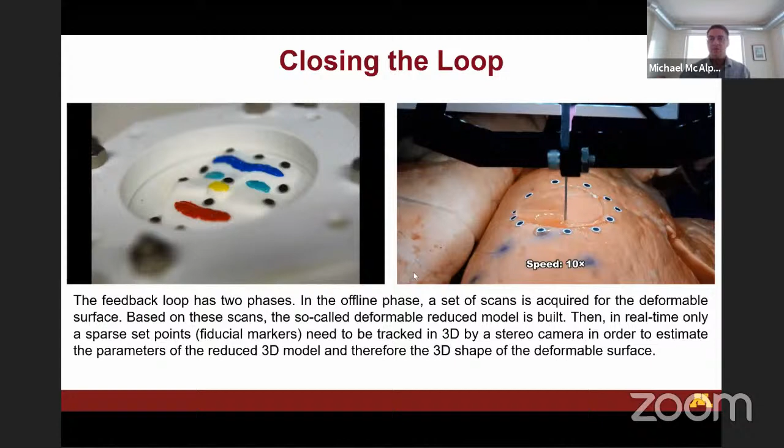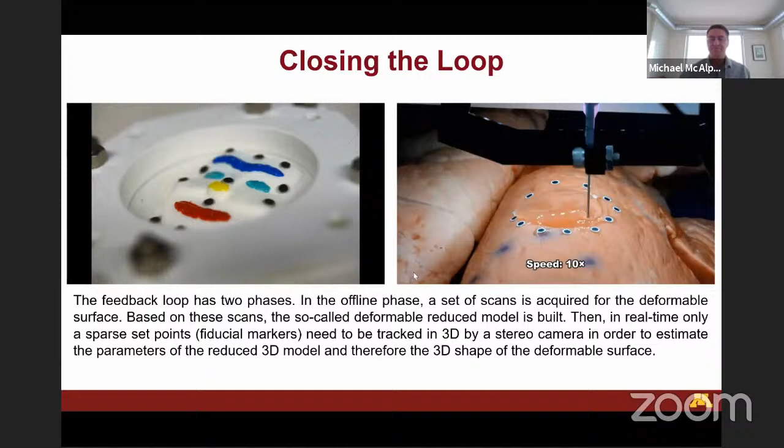Here we're actually printing an ionic hydrogel on a breathing lung surface by tracking this deformation. You can see there are only 12 fiducial markers, but we're still able to do this tracking because of the offline process we did first, to print this ionic hydrogel directly on the surface of breathing lung tissue. Once we cure that ionic hydrogel after printing, we can create a sensing structure.

This is another example of an ionic hydrogel sensor, but the difference is that this is actually a device called electrical impedance tomography, which has been made many times using conducting materials like carbon black. But I believe, if I'm not mistaken, this is the first time it's been done using an ionic hydrogel. The idea here is you place electrodes around the circumference of the device.

So instead of having to print multiple sensors as an array, by printing the electrodes on the circumference and then doing some clever voltage work - it's basically like a voltage divider - as you scan the electrodes on the circumference, you can create a pseudo array which doesn't actually exist on the interior of the structure, and basically map out the deformations. Of course the spatial resolution is not great, but after we use the tracking to print this device, it was able to map these deformations in real time using this EIT ionic hydrogel based system.

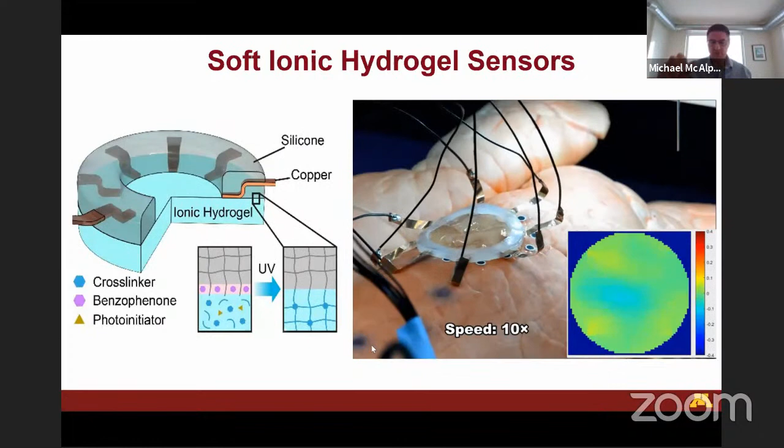I know I need to finish by 10, but there's one last thing I want to show, which I think I'm most excited about, even though I seem to be the only person doing it - can you directly 3D print semiconducting devices? Can we totally decouple from the clean room? Can we give up the clean room? Can we bring semiconductors into the printing process and actually print not only soft conductors or soft ionic conductors, but also semiconducting devices? We first demonstrated this in 2014, when we were still at Princeton.

We showed that by layering multiple materials, including silver nanoparticle on the bottom, then two organic polymer layers for hole injection, then a cadmium quantum dot layer as the active semiconductor layer, and then a liquid metal - pioneered by Michael Dickey, who also gave one of these EML webinars - as our top electrode, we can essentially create a semiconducting device where every single layer, the electrodes and the semiconducting layer, are all 3D printed on the same platform. Not the world's greatest device, but it works.

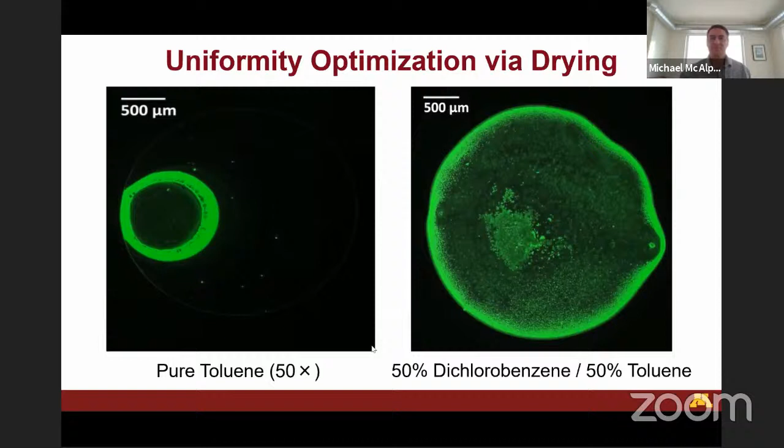So we don't do fundamental research really, but we can use tricks from the fundamental world to explore these applications. So this allowed us to fully 3D print two cadmium selenide devices. One is a green, one is an orange. They're different size particles, both cadmium selenide. And of course, being quantum dots, they have good color purity and good saturation. The entire structure is 3D printed: the electrodes, the quantum dots, the top liquid metal contact.

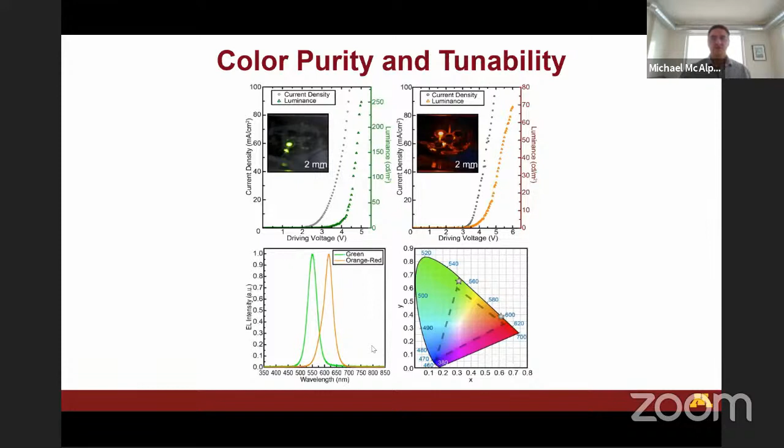And actually, when we got to Minnesota, the chair of my department was synthesizing silicon nanocrystals in a non-thermal plasma. And these silicon nanocrystals are 5 nanometers or less in size. And so that's actually below the Bohr exciton radius of silicon, which is 5 nanometers. So they emit light, unlike bulk silicon, which has an indirect band gap.

So this is an example of replacing the cadmium selenide with silicon nanoparticles. So this is the world's first fully 3D printed silicon-based electronic device. So now we're actually taking silicon electronics and integrating it into the printing platform to create a device. And for silicon, the band gap is in the infrared, but in the quantum dot, it shifts a little bit into the red. And so you can see in this movie, that's a red LED that's actually based on silicon nanocrystal light emission by incorporating these quantum dots into the structure. So basically taking silicon from the wafer, from the clean room, and incorporating this into the printer.

And we can build electronics into 3 dimensions. This is a cube where we basically incorporated 8 multicolored LEDs built up into 3-dimensional space in this cube. Again, this is an example of the multi-scale because now we have nanoparticles as the active layer. We have microscale printing, and we have a macroscale device, this cube made of silicone, 1.5 centimeters on each side, where if you probe the different electrodes on the cube, you can see it lights up the LEDs within the cube. Entire structure 3D printed: the silicone, the liquid metal, the quantum dots, the silver nanoparticles. All these materials, normally thought of as distinct materials, all coming together on a single platform to print this electronic cube.

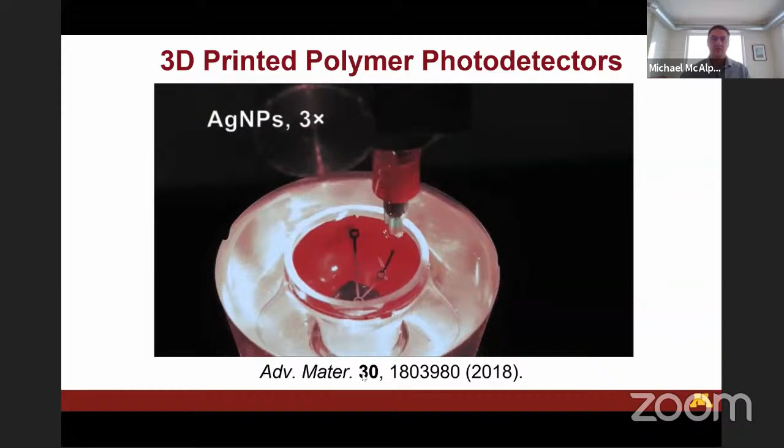And that's an older example, but a year or two ago, we also did not only LEDs but photodetectors, where we can print directly on the inner surface of a hemisphere. So these are entirely 3D printed semiconducting photodetector devices where we're printing silver nanoparticles first as the bottom layer, up along the inner edge of this glass hemisphere. And those rings there are so that we can actually visualize light through the device. And then we print this hole transport layer.

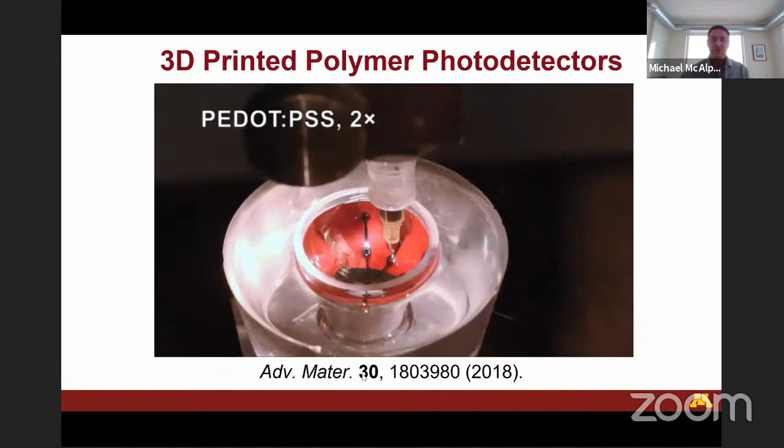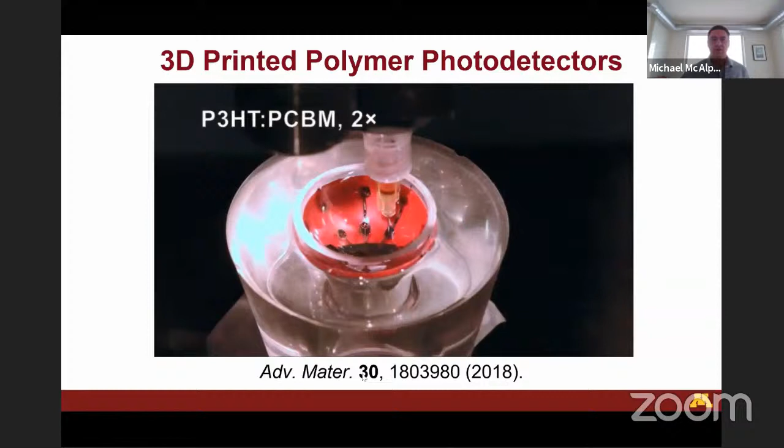And actually, Zhigang's former student, Xuanhe Zhao, who also gave an EML webinar, has also published some interesting work on printing PEDOT:PSS. This is the semiconductor. It's a polymer blend semiconducting layer for the photodetector. And this is our top electrode, which is this blob of liquid metal. There's probably a better solution than this, but we haven't figured it out yet.

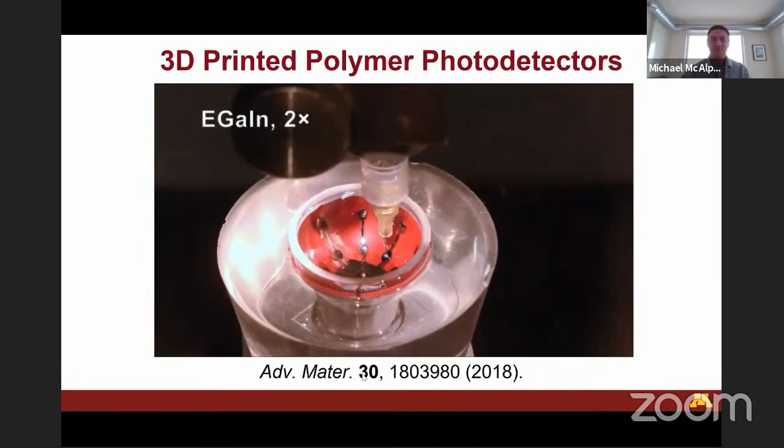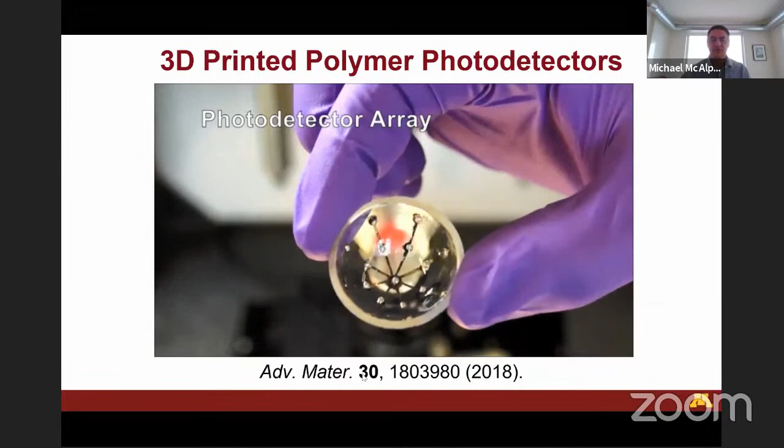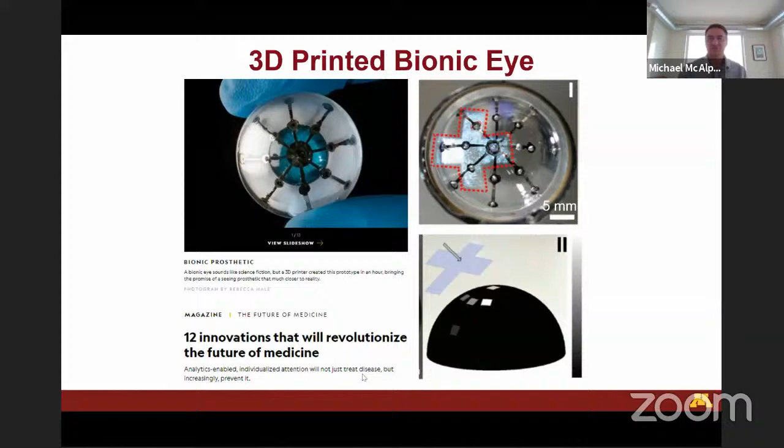And so we call this our bionic eye, because it's an array of photodetectors directly printed on a hemisphere, no clean room required, and then you can image through the bottom to create like a bionic eye. So our 3D printed bionic eye actually does function. Right now, there's only a few pixels on it, but you can actually image this cross on the surface of a sphere.

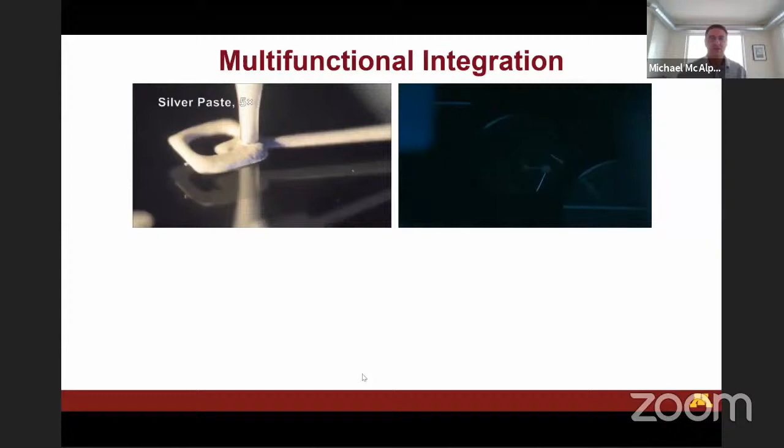But you can see each of the layers here printed. The silicone, we use that to avoid shorting. This is the top liquid metal on the device. We print the silver paste on top of that liquid metal to create this integrated structure. And you can see in the right-hand movie that as those LEDs light up, those are the actual fully 3D printed LEDs lighting up. And every time they light up, the photodetector that was printed actually responds to that light.

So I'm excited about where this is going. I think there's many applications. We still need to understand better many different things, the materials integration, and what really are the important applications.

Where do we go from here? You know, there's a lot of potential here. And the question is, what are the most important problems and what can we do with this emerging technology? And luckily I have some students who are excited to explore this space.

So I finished exactly on time. Perfect, Michael. Okay. Yeah, can you please unshare your screen so we can see panelists? Sure. Terrific.

Thank you very much, Mike, for the very exciting and visionary talk. I'm not sure which YouTube channel you normally follow to get inspired for those ideas. I would like to follow the same YouTube channel and watch them. And now we open up the floor for the questions.